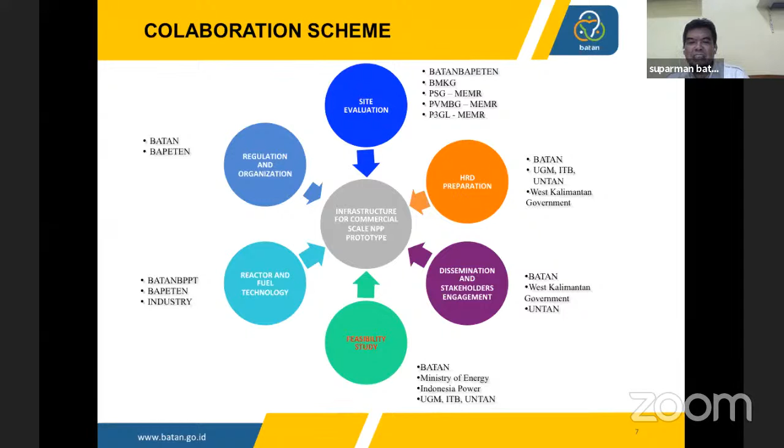And for the feasibility study for non-site, we have cooperation with the Ministry of Energy and also Indonesia Power, one of the companies under PLN interested in these activities. Also some universities are involved, for example Gadjah Mada University from Yogyakarta, Institute of Technology Bandung, and also local universities, Untan, which is Universitas Tanjung Pura, or Tanjung Pura University, in West Kalimantan Barat.

Now the status of national research priority. As we know, from the IAEA we have a guideline on how to perform the nuclear energy program in Indonesia. Based on this infrastructure development, there are 19 infrastructure issues that should be prepared before we implement nuclear energy. We had an Integrated Nuclear Infrastructure Review mission in Indonesia where the IAEA reviewed our readiness of infrastructure.

They found there are still 3 issues not ready yet, namely national position. We know that until now the government has not yet made a decision to go nuclear. Following that, we know there is no NEPIO in Indonesia yet. In the management aspect, there is no operator candidate decided, and then in stakeholder involvement, we need to improve.

So regarding this national issue, the 19 infrastructure issues, we developed the research priority under the IAEA milestone framework, where phase one is pre-project activities. We should conduct a feasibility study or pre-feasibility study, and also a site survey, and these two activities strengthen the national position. We hope that from these activities the government will make a decision. This is milestone 1, and this decision is very important to continue to phase 2, the project activities.

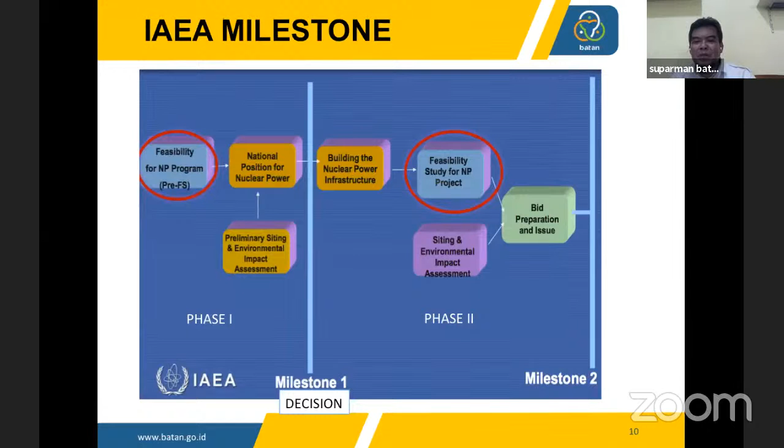As I mentioned before, for this roadmap we are still in phase 1, the pre-project activities. We hope that by 2024 this project will finish, and these pre-project activities will be a consideration for the government to make a decision. We hope the president will make a statement to go nuclear, that there will be a NEPIO, and that nuclear energy will be included in the business plan of the utility company, our RUPTL, the business plan of PLN. After this, we hope the state-owned company, private company, or cooperative will continue to construct a nuclear power plant or SMR in West Kalimantan Barat.

So Batan is only involved in the pre-project activities, because this is a commercial nuclear power plant, and Batan is not allowed to construct a nuclear power plant for commercial purposes. So we only prepare the pre-project study, including site evaluation, as consideration for the government to make a decision.

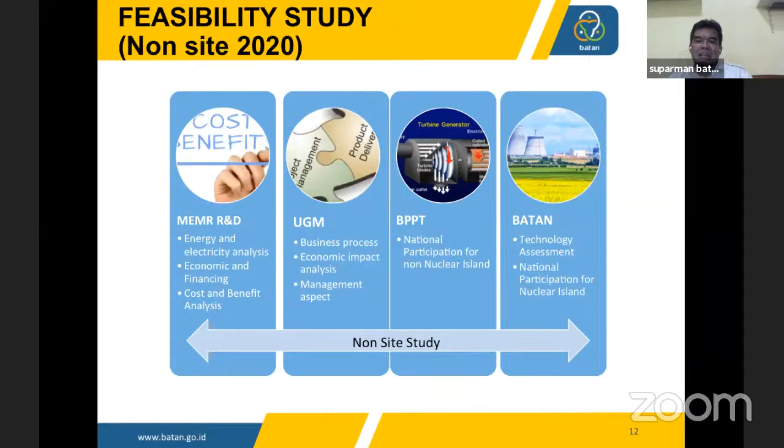These activities were in 2020, and for the site study in 2020, we have done many aspects this year, for example demography, geology, hydrology, meteorology, and so on. We still continue this year because we need time, for example for the geology survey, and we also need money to conduct this aspect.

So why did we select West Kalimantan as candidate site? Because we know that in West Kalimantan there is a lack of electricity, they still import electricity from Sarawak, Malaysia. That's why the government of Kalimantan Barat asked the president to build a nuclear power plant in West Kalimantan to fulfill the demand there.

Another consideration for choosing West Kalimantan Barat is that there is much potential demand from industry. The government of Kalimantan Barat is developing an international port near the candidate site, the Kijing International Port, and the West Kalimantan Barat government wants to build an integrated industrial park near this port along with an aluminium refinery. So the demand is quite big in West Kalimantan Barat to support this industry.

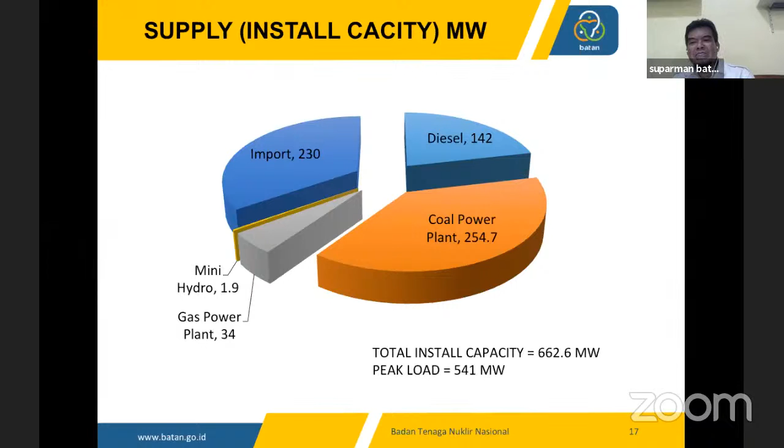Another reason we choose West Kalimantan is that, as I mentioned before, West Kalimantan still imports electricity from Sarawak, Malaysia, around 230 megawatts, almost 50% of the peak load in West Kalimantan. This is concerning because some people in West Kalimantan think that if Sarawak or East Malaysia stops supplying electricity, it would be quite dangerous for the electricity supply in West Kalimantan. That's why many people agree with nuclear power plant development there. Also, diesel generation in West Kalimantan is still high, more than 100 megawatts.

Another thing we know is that the government of Indonesia wants to move the capital city from Jakarta to East Kalimantan, and PLN has a plan to build a transmission line from West Kalimantan to East Kalimantan. So I think if the capital moves to East Kalimantan, there will be much more demand there.

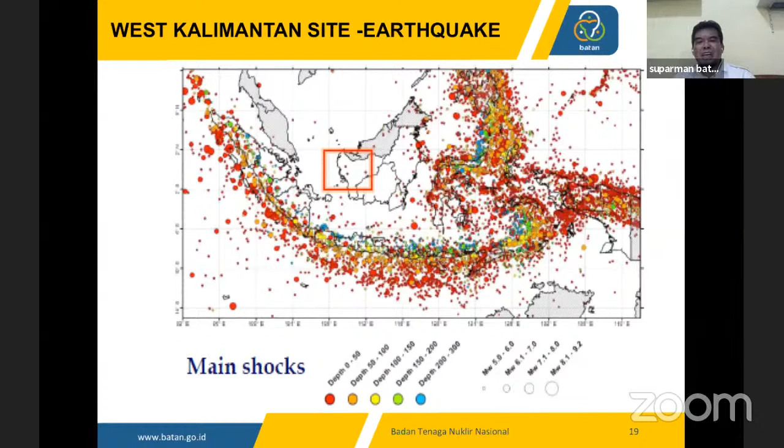In terms of earthquakes, West Kalimantan is very stable because earthquakes rarely happen there, only 4 or 5 times. And there are no active volcanoes in West Kalimantan.

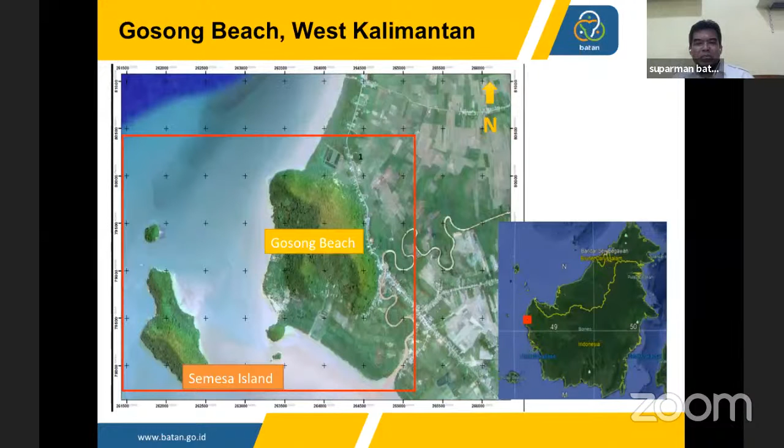Our candidate site is located at Gosong Beach, West Kalimantan, north of Pontianak. Pontianak is the capital of West Kalimantan. In front of Gosong Beach there is Semesa Island, and the distance between the beach and Semesa Island is around 1 kilometer.

For potential sites, besides West Kalimantan, we also have other sites, for example in Muria, Bangka, and also Banten. For large scale NPPs, they can be developed in Sumatra or Java Island because the transmission line and demand are quite big enough for a large scale NPP. But for SMR, small modular reactors, these can be developed in the eastern part of Indonesia, for example in West Kalimantan or East Kalimantan, and also other parts of eastern Indonesia.

I think that's all for my presentation. Thank you very much for your kind attention.

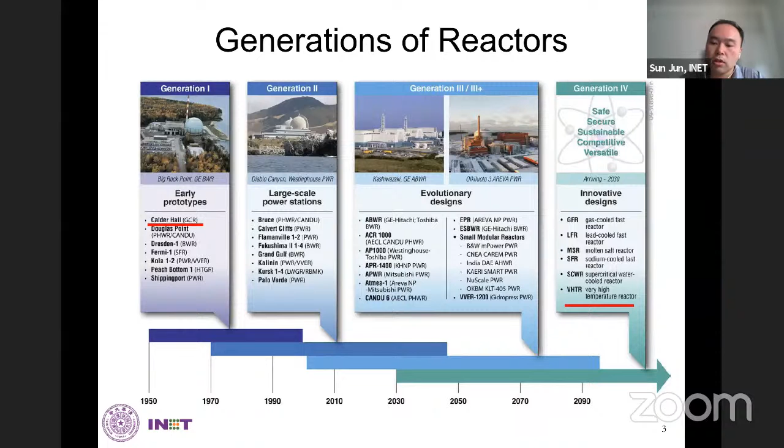So we all know that the gas-cooled reactor has the same history as other kinds of reactors. At the very beginning, we had early types of gas-cooled reactors, but at that time we used carbon dioxide as the coolant, and we have more than 50 units built in Europe, in Great Britain, and other countries. So after that, we realized that we wanted to increase the temperature output of that reactor.

We changed the fuels into ceramic coated fuels. We changed the coolant to helium so that we could increase the output temperature up to 700 degrees C or even higher to 950 degrees C. At that time, we had 3 test reactors built in the world and another 2 prototypes in both Germany and the US. After those experiences with the early HTGR reactors, we found that the safety issue must be emphasized for all this kind of reactor.

Then we had the idea of inherent safety and the concept of modular HTGR. By this kind of concept, we can realize the self-acting decay heat removal of this design, and we have followed this concept to build test reactors and several designs.

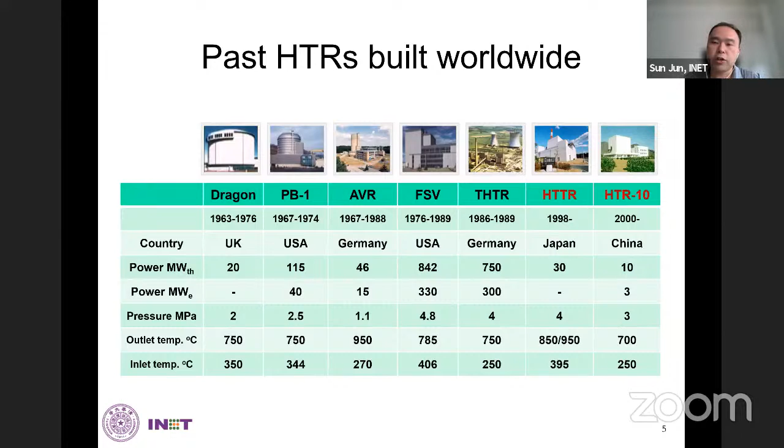So about modular HTGR, what's the technical basis for that? Most importantly, I think there are 3 important points I want to emphasize here. First, we use helium as the coolant because it has very good chemical and neutronic features. Second, we use a lot of graphite as the moderator and the structural material. And also the most important one, we use the unique design of the tri-isotropic (TRISO) particle as the fuel.

By these major features of the modular HTGR, we can realize very high temperature operation, and more than electricity generation, we have more non-electric applications.

Under the framework of the GIF, Generation 4 International Forum, we have built a technology roadmap for this kind of technology. At the very beginning, in the year 2002, we wanted to realize higher temperature output as high as 1000 degrees C, especially for the hydrogen production market.

After 10 years of experience, we found that we still have a larger market for the temperature range between 700 and 950 degrees C. So we divided the technological roadmap into 2 phases. Right now we still have more efforts to realize the temperature around 750 degrees C.

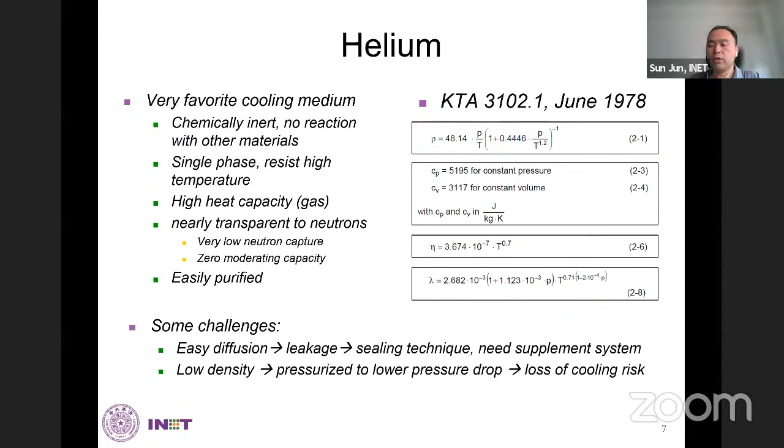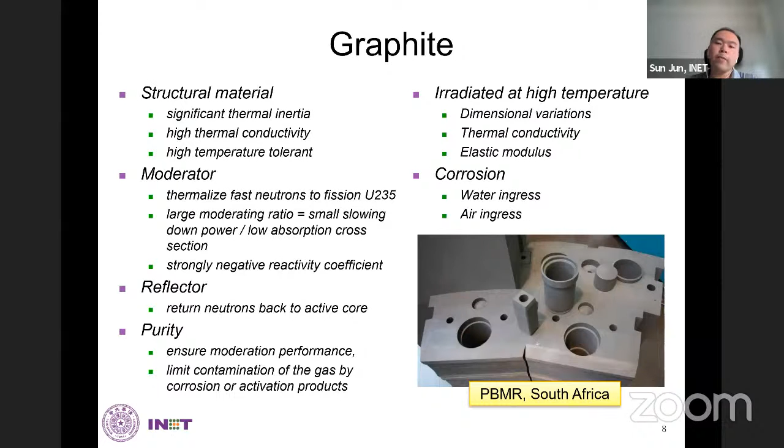And one of the important layers is the silicon carbide that will have the function to retain the fission product inside this TRISO particle during normal operation and even extended scenarios.

So by this very small size of the TRISO particle, we can distribute these particles into graphite, or we can use the spherical element for these particles, or we can put them into compacts. So with the spherical element, we can design the pebble bed type HTGR, or with the compact fuel elements, we can have the shape of a block type element and also the design of prismatic HTGR. So following the modular HTGR designs, we can have prismatic designs or pebble bed modular designs.

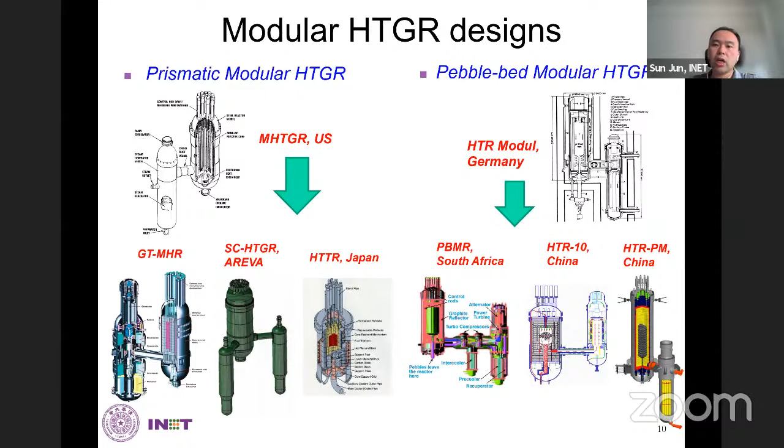And following the design of pebble bed modular HTGR, we have the early one as the HTR Modul from Germany. And also following that, we have PBMR from South Africa, HTR-10 from China, and HTR-PM from China.

So the important point, as I mentioned, is that the modular HTGR follows the idea of inherent safety. Inherent safety also has other names like intrinsic safety, meltdown-free reactor, catastrophe-free, or walkaway safety, etc. So those concepts or names mean that following inherent safety, we can have fundamental measures to ensure safety without any additional systems.

So from three aspects, like control of the power, removal of the decay heat, and also retention of radioactive materials, we can realize the inherent safety design, and we can keep it safe after accidents. So I will introduce them one by one.

The first aspect is reactivity control. We know that this is important for the design of a reactor. For HTGR, we can realize full range negative feedback, and also, most importantly, we have a larger margin for temperature increase during an accident.

If we compare this kind of design a little with PWRs, we can utilize almost a 1000 degree temperature increase during an accident. But for PWRs, maybe we can only use like 20 degrees C. So even if we have the same level of negative temperature feedback, when multiplied by this different temperature range, we can have different reactivity compensation during an accident. So clearly for a modular HTR design, we can have a very large negative reactivity compensation during an accident, to ensure safe shutdown in any conditions.

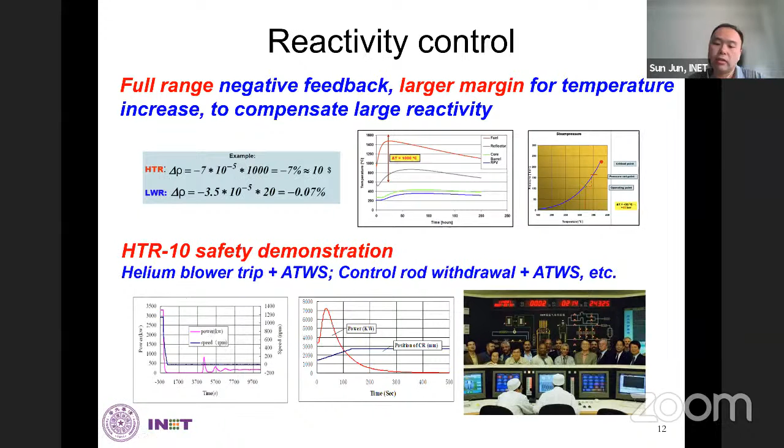The second important aspect is decay heat removal. We all know that after the fission process, we will get decay heat over a very long process. For this, we have to use additional systems, or some design of the system, to remove that heat after shutdown. So historically, we have many ways to achieve that. For example, we can use an active system to do that, or we can apply a passive system to realize decay heat removal. But for modular HTGR, we have a very different idea.

We use the term self-acting removal because, as I mentioned, for this design, we have a lot of material with higher specific heat or higher thermal conductivity.

So during the higher temperature operations, we can use the natural properties of this material to remove the decay heat by heat conduction and heat radiation. So for the design HTGR, we have support from the natural properties of the material, and we can realize self-acting heat removal.

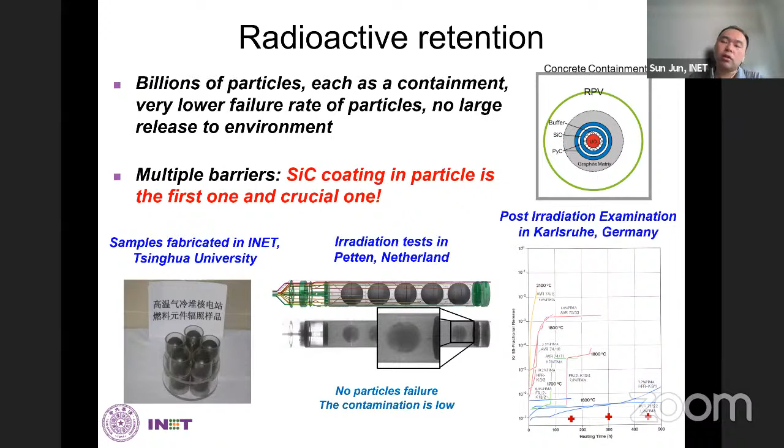You can find more information and knowledge from the recently published book by Professor Kugeler and Professor Zuoyi Zhang. You can find the English version from Springer.

About China, as I mentioned, we chose the pebble bed HTGR, and we still have very clear positions in terms of HTGR technology in China, especially for power generation, cogeneration, and also hydrogen production.

In China, we began our research in the 1970s. It's almost 50 years. After we learned how to design the reactor, we tried to build our own test reactor, HTR10. We are currently undergoing the demonstration plant called HTR-PM, and after that we continue with our commercial plant designs and applications.

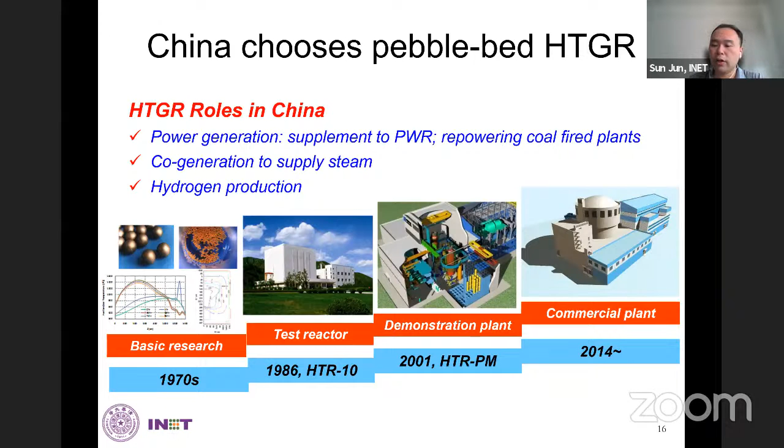For HTR10, it was strongly supported by the central government. We had the National High-Tech Program to support the design and construction. We began construction in 1995. After 5 years, we reached first criticality, and after that we had 3 years of operation at full power.

After that, we demonstrated many kinds of experiments to prove and understand this kind of design. In recent years, we restarted HTR10 and operated it for many purposes. One is to train the operators of HTR-PM. Another purpose is for further experiments, for example to measure the temperature inside the pebble bed core. This year, we still have another program to support very high temperature operation.

You can find some of the major design parameters about HTR10. I think many colleagues have visited our facility in Beijing. For HTR10, we have many operation modes, such as electricity generation, cogeneration, or only heat production. The safety demonstration tests are also famous because they proved the design of the modular HTGR.

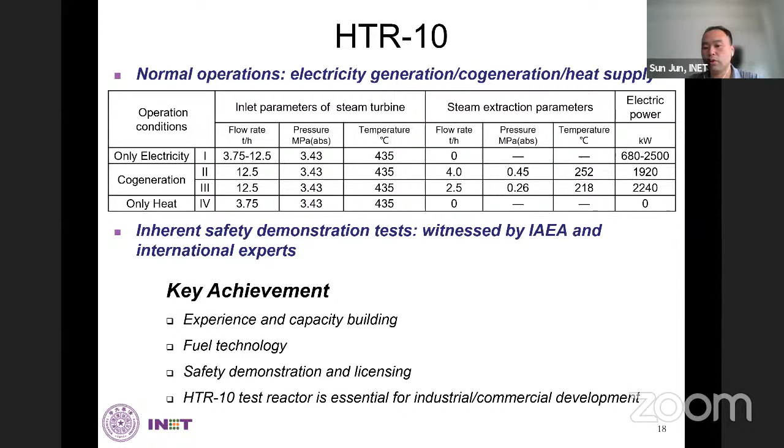After HTR10, we had the idea to build a larger scale HTGR called HTR-PM. The Chinese government continued to support us in R&D, and we have a very good team to deliver this technology for industrial application.

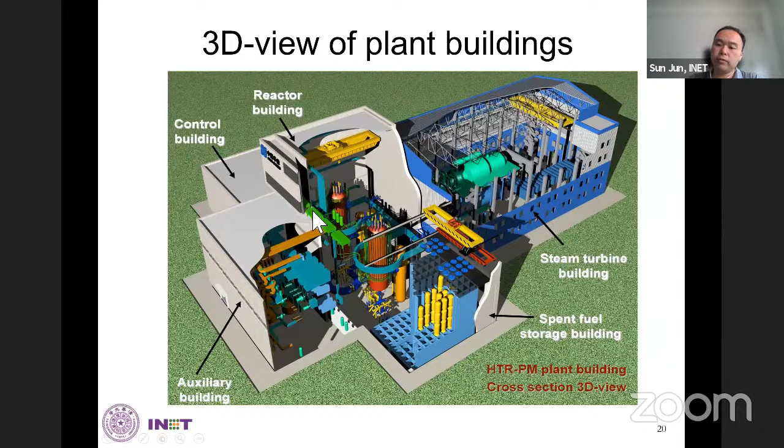For each NSSS modular or reactor modular, we have a design like this: a side-by-side design of the reactor pressure vessel, steam generation vessel, and a hot gas duct vessel to connect these 2. Each reactor can generate about 250 megawatt thermal, and because we have a smaller power density, the core size is large. Inside this reactor, we have around 420,000 fuel pebbles, and by these pebbles it can heat the helium up to 750 degrees C.

About these 2 NSSS, the heat will be transferred from the reactor core to the secondary side of the steam generator. These 2 steam generators will combine the steam into the steam turbine to generate electricity. Also, by several levels of steam extraction, those steams can be used to heat up the feed water and also to increase the energy conversion ratio of this whole plant, which could be around 42%.

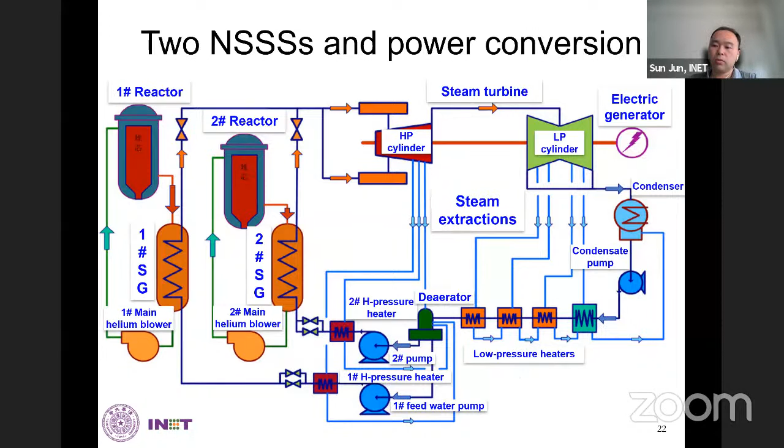So this kind of design is the important basis for modular HTGR if we want to enlarge the power output in the near future. By HTRPM, it followed the design of a modular HTGR, but the implementation of engineering and technology is quite unique in China.

For example, we listed several important items about the innovations and also published that in a recent paper. We use more than 1 reactor modular. We have a design of helical coil tube bundles for the steam generator. We use electromagnetic bearings for the shaft of the helium circulator. We use a different combination of reactivity control system. We improve our fuel handling system designs, and also we use the dry storage system for the spent fuel storage.

Since the scale of these designs are new, we have to verify those designs by the full scale and the full environment under the helium conditions. So we have our own engineering lab for all these tests, and we finished all those tests and proved the design can meet the requirement from the regulatory.

As I mentioned, just when we finished the full power operation of HTR-10, we had the idea to design HTRPM. From 2004, we started the standard design. Then we got support from the government and also the industry partners. Then we continued with our preliminary design, the safety and assessment, and also those verification processes.

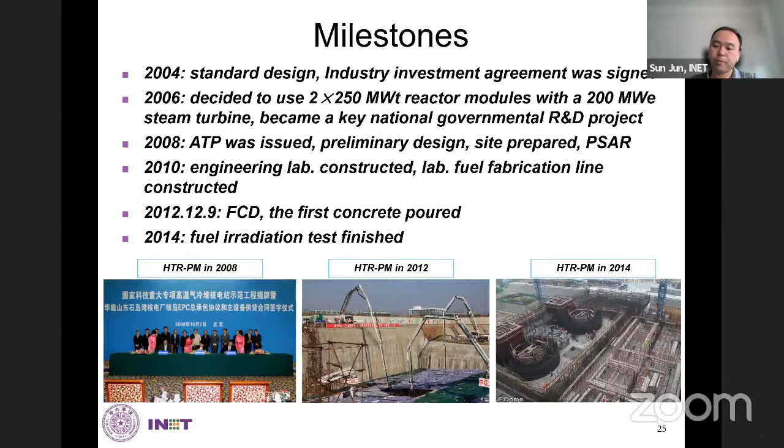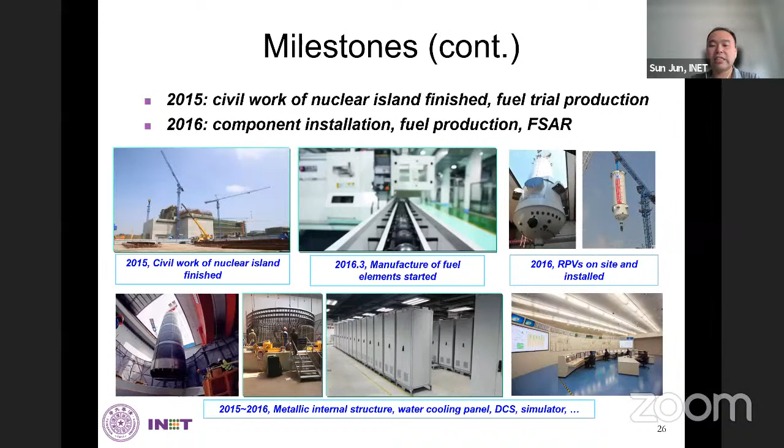After 2015, we almost finished the civil work of the Nuclear Island, and then we started the installation of important components such as the reactor pressure vessel, the metallic internals, the water cooling panels of RCCS, and also other important systems like DCS and the full scope simulators.

Between the years 2017 and 2019, we continued with the installations. The most important and most complicated one is the ceramic internal structures. In this picture, you can see the structural material is thousands of blocks of graphites and carbons. It's important to put every block into position and put the shape together. We also had the installation of a steam generator and a helium circulator during that time.

Then when we came to the year 2020, we started our commissioning. First, we had the cold test, where the pressure boundary reached the design limit. After that, we started the helium circulator to heat it up to 250 degrees C. In March of this year, we finished the hot test of both reactor modulars.

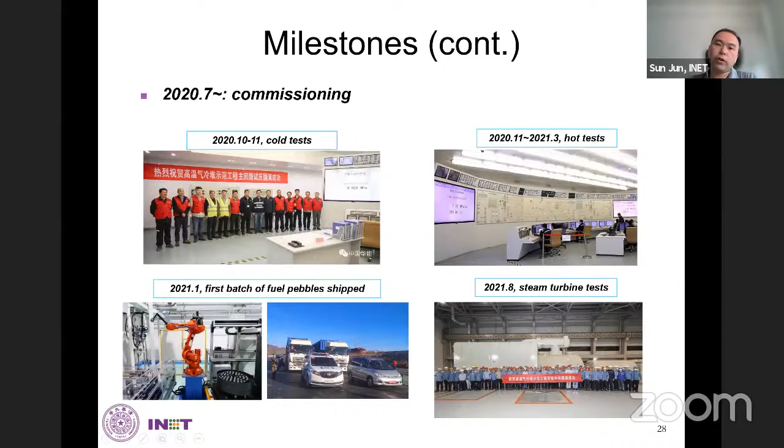At the same time, we have fabricated enough pebbles to prepare for the fuel loading. We delivered the first batch of fuel pebbles to the site at the beginning of this year. Just last week, we almost finished the steam turbine test, but with non-nuclear steam. So everything is ready for the fuel loading. I think we may have exciting news in the coming months.

After HTRPM, we still have plans for a larger size and commercialized HTGR. But based on HTRPM, we have proven technologies to use, such as the design of the NSSS modular. We will use the experience based on those engineering tasks, design, manufacture, construction, commissioning, licensing, and even project management. Those experiences accumulated during the last 10 years will help us shorten the time.

Also, this will decrease the cost of this larger scale HTGR. We have 6 or more NSSS modules planned for the near future designs. Right now we have finished the standard design of HTRPM 600, which includes 6 reactor modules inside the nuclear power plant, and we continue with the feasibility study of some domestic site candidates.

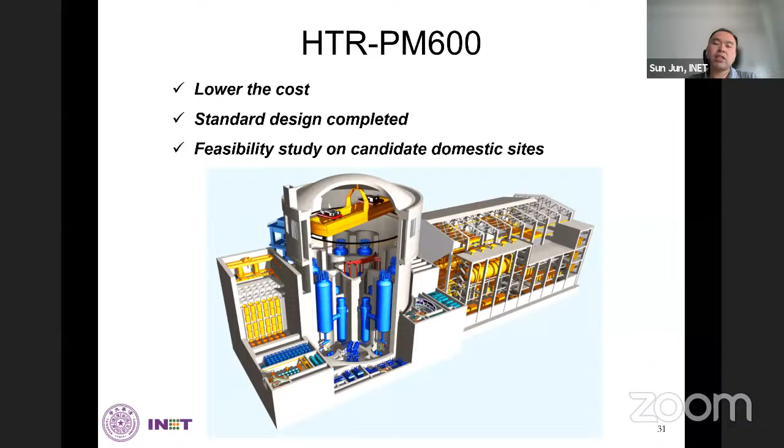The important thing for the design is to further lower the cost and try to have economic competitiveness with other PWR designs. As for the nuclear safety regulatory framework in China, China has developed its new nuclear regulations based on IAEA frameworks, but also combined with national conditions and years of practical experience. We have the same framework as the IAEA, and during licensing processes, the technical goals, safety requirements and standards are consistent with international safety standards.

Also, during the safety review and licensing of HTRPM, it generally follows China's NNSA nuclear safety regulations. For the licensing processes, the NNSA can issue permits or licenses, such as siting, construction permit, operation license, permit of decommissioning, and license for operators. Those are important for the design and operation of these nuclear power plants. So that is almost all the points I wanted to deliver in this presentation.

And this is exactly why we have so many designs of SMR, and so many plans for deployment. But so far, only we are doing it in real—only ACP100 is under construction. There's also a document compiled by IAEA called the Development of SMR All Over the World. It's an annual report, and you can download it directly from the IAEA website. It's quite interesting reference material you can look at after our seminar.

So why is China so interested in small modular reactors? The first thing is that it can do things that larger power reactors like HPR1000 cannot do. SMR is featured by small scale, simpler design, and lower cost, so it's economically feasible. It also has higher safety, and the technical feasibility to be built even among denser populations.

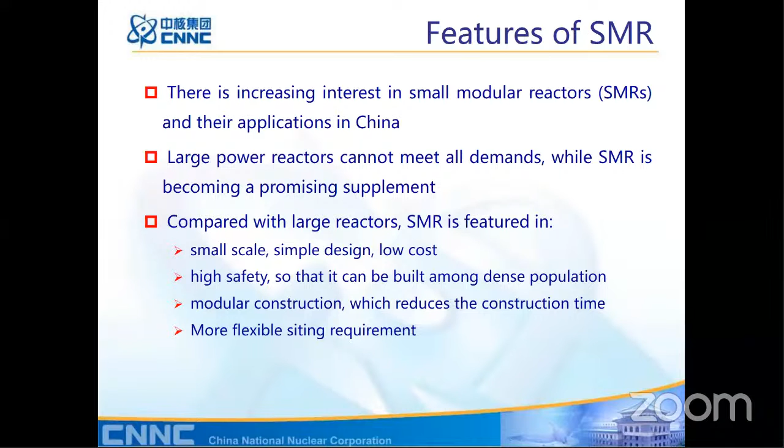It can be modular constructed. Some can even be constructed in plant and transported to the site. Construction period could be dramatically shortened, which is another good thing for its economy. Also, it could have much more flexible siting requirements, so you don't need to find a large rock—it can just be implemented. One application is to replace fossil plants, as flexible as that.

Then come to the applications—because of these features, the small modular reactor's applications are vast. One is to replace coal power plants, especially in the northern part of China, where there are a lot of smaller coal fossil plants generating less than 200 megawatts of electric power. Phasing out these plants is a national strategy to reach peak carbonization by 2030, as well as carbon neutrality by 2060.

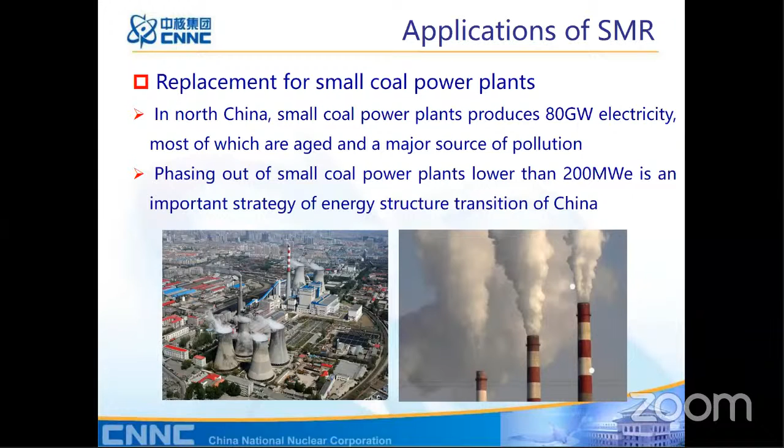So it's quite fitting for small and medium electricity grids—for isolated grids, like islands, as well as small cities. As for Indonesia, called the nation of thousands of islands, I believe small modular reactors are quite fitting for these situations.

Also, it can provide for special requirements like mining in remote areas, for high energy consumption plants, and things like that.

The other application is for regional heat supply. This is also a large part of reducing carbon dioxide emissions. The industrial heat demand in China is now around 1 billion tons of steam, and this occupies 10% of the total carbon emissions.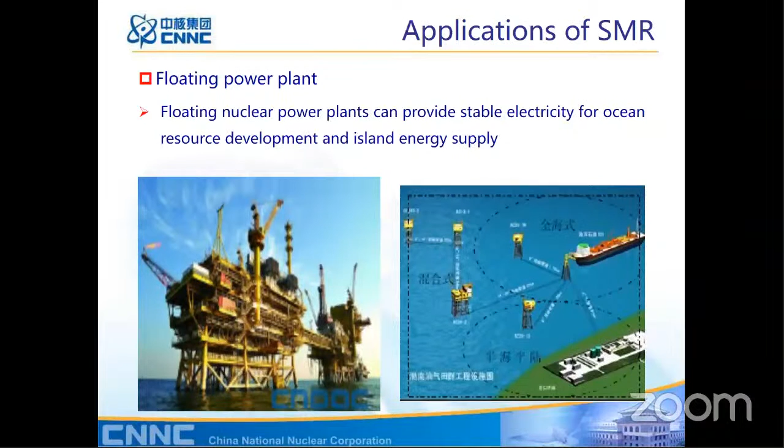The other application is seawater desalination. Coastal cities around our coastline, especially major cities in China, actually lack fresh water. Some participants today might have heard of the significant engineering project transferring water resources from the south part of China to the north part of China—it takes nearly 20 years, and now it's under operation. But SMR is an alternative way to also tackle this problem.

So with the wonderful features of SMR and all these practical applications, it just started very beginning 30 years ago. Now we have developed, especially CNNC has developed our series, which includes not only ACP100, but also what we call DHR for heat supply, as well as the high temperature reactor, as Dr. Sun has just presented. So all of these small modular reactors in China are mostly pressurized water reactors.

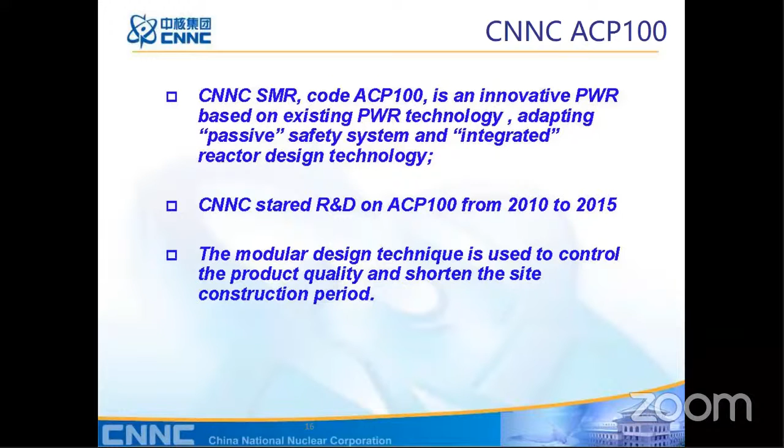We are adopting what we call the passive safety system with the integrated reactor design technology. The design phase ran from 2010 to 2015, for 5 years. It uses the concept of modular design for quality control, as well as to shorten the construction period.

So at the very beginning, we have certain special demonstrations for technologies. This is the start line.

And then we finalize the general design, or what we call the top design. We updated our design after the Fukushima accident. We finalized our preliminary safety assessment report, which is a sign of the accomplishment of the standard design.

Of safety review by an independent third party, the IAEA. This is how we started the design and helped finalize it, with the promising certification, or the independent third-party review. So this is not us saying we have a good design, but other experts saying your design is feasible, is engineering proven.

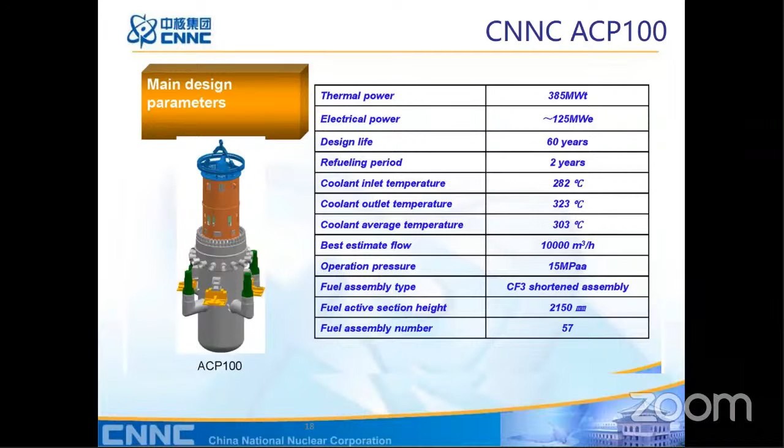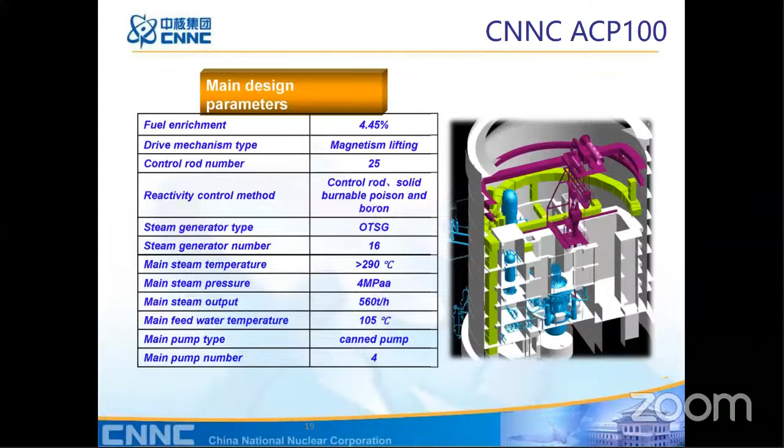And we have our own fuel supply, what we call CF3, so there's no worry about shortage of that. We are really good at making things. And also we have our unique technology, what we call the once-through steam generator, which promises high efficiency, as well as one really important feature, this integral design, as well as the canned pump.

Another thing is that we have less than 1×10⁻⁷ predicted core damage frequency, as well as one magnitude lower, that is 1×10⁻⁸ per reactor year of predicted large release frequency. This frequency is similar to a star hitting the Earth with dramatic disaster. So it's really acceptable.

Because of all the engineering optimization and design changes from the experience of the Fukushima accident, the safety is guaranteed.

And here is what we call the integral design. The conventional, very first generation of PWR started from this, what we called the loop type. And then we moved further into the compact design. But we do believe the most feasible and most advanced is the integral design.

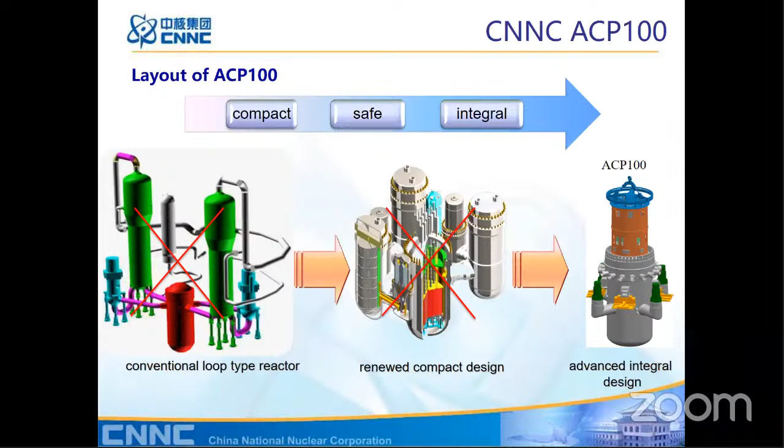We eliminate the LOCA, the loss of coolant accident, the most serious accident for PWR. We practically eliminated it by this integral design for large LOCA. And this is why its safety is guaranteed, based on innovative technology of the once-through steam generator, as well as canned primary pumps.

What you can see is the integration by the steam generator as well as the pump. The key technology for safety, for better operation.

Another one is that the most important thing of a reactor is its reactor core. And these are all our own patented technology: the most advanced CF3 fuel, as well as the core monitoring and detection system.

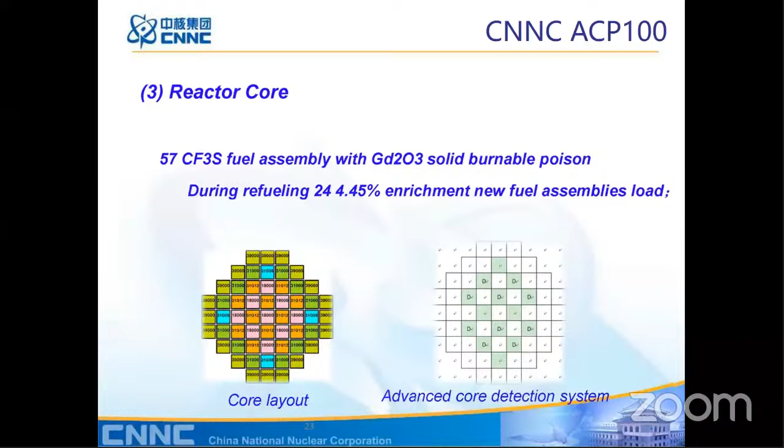And as well as safety, we have here the integral and passive safety. I'll come further with that. So there's no active emergency cooling system, there's no active containment spray and recirculation system. There's no need for operator intervention for at least 72 hours, that is 3 days, enough for all kinds of recovery that you can have. And there's no safety-related emergency AC power, so we just need some batteries.

And the integral design minimizes both the probability and impact of design basis accidents, as well as we have a much smaller emergency planning zone. And this is the technical feasibility for putting a reactor near the center of a population zone.

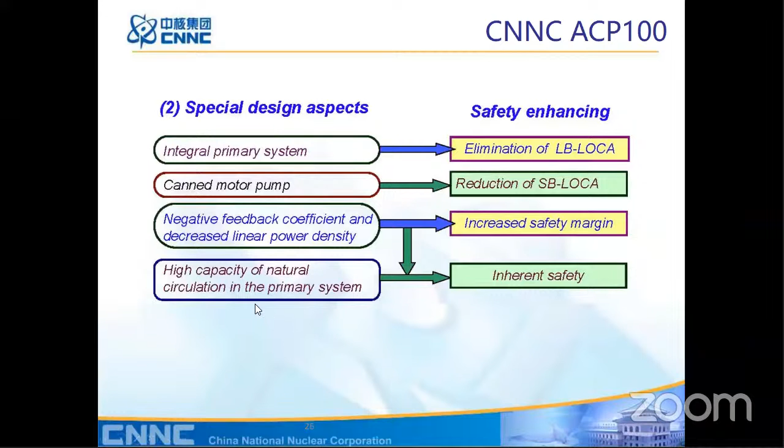What we have, some of which I have already mentioned: the elimination of large breaks, reduction of small breaks, increased safety margin, as well as inherent safety by natural circulation of the primary system. Also, core coverage is guaranteed by the core makeup tank as well as the accumulator.

This is the same for all passive safety designs. But here we have natural circulation between the core and the cavity, as well as heat conduction to the large pool outside of the containment. That is the guarantee, that is the most promising ultimate heat sink.

And this is exactly why we can have one magnitude lower for the core damage frequency, as well as the large early release frequency.

Because of the sound safety of ACP100, we now have a smaller non-residential area as well as planned restricted zone. And we have guidance from the safety authority, the NNSA, the National Nuclear Safety Administration of China, that under strict circumstances, if your technology is advanced enough, the restricted area could be less than 100 meters.

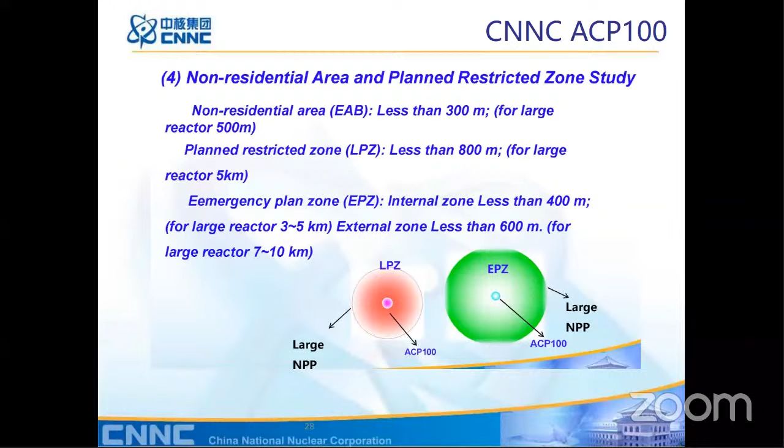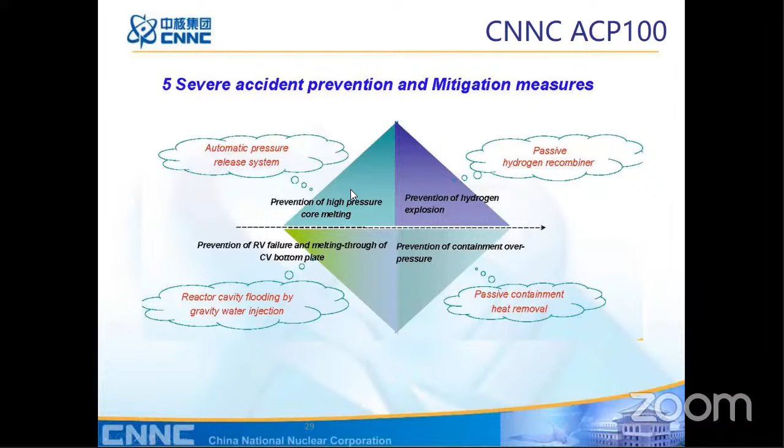Also another part, especially after the Fukushima accident we talked a lot about, is the severe accident. We have all dedicated systems, countermeasures to cope with all expected phenomena like core melting, high pressure core melting, hydrogen explosion, as well as the melted core within the reactor vessel. All this design is reviewed by us as the generic reactor safety review, organized by the experts from IAEA.

And why could we pass this third-party independent review? Because we have done experiments. We have demonstrated feasibility, demonstrated this technology by experiment, not just by design. We have shown them these are consistent with our design. And these are the most important ones, like the control rod, the fuel assembly, the activation of the passive heat removal system, as well as the passive containment heat removal. And all of these take really long time.

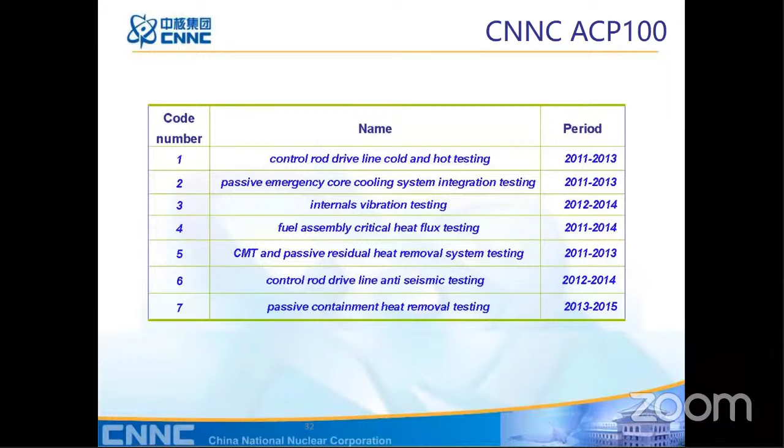Some of them 2 years, and some of them even longer, years. What you have seen here, these are all the experimental facilities, but just some of them. What we call accumulation of experiments, know-how of your design. Why we are so confident of our design, why we are so confident that they are good.

And of course, another part is for the equipment. Not only to prove that our design is feasible, but also we have to prove the design of the equipment, the manufacturing of the equipment is not only reliable, but also economically feasible. And we have done that now.

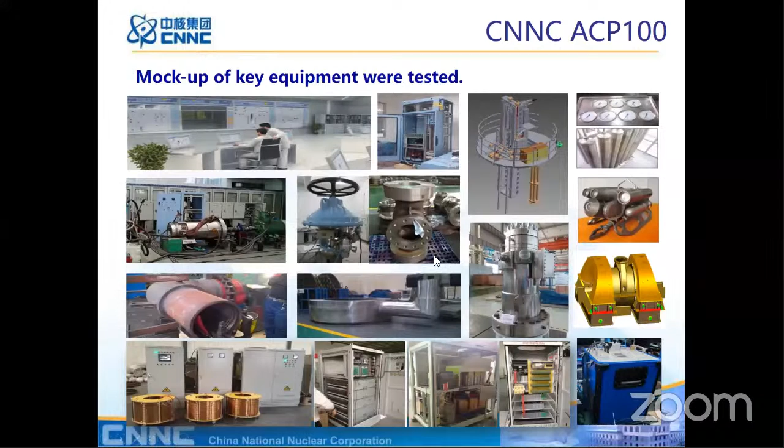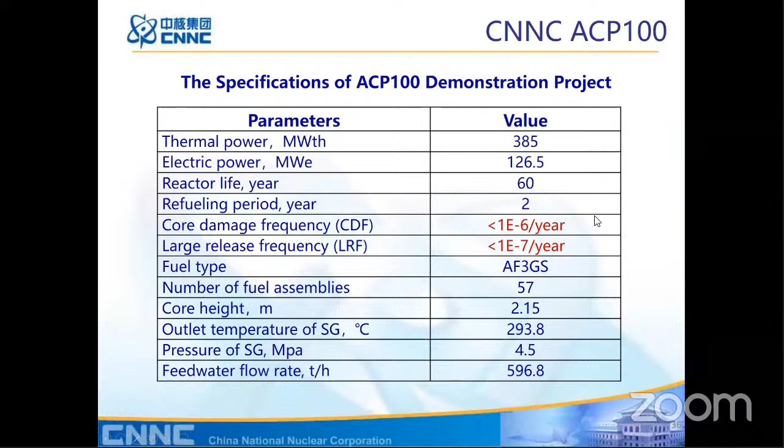And this is the final design, what we call one reactor, one turbine design. And this is the final specification for the demonstration project. And this is where it's located, also on the island, the Hainan province. And here is the site.

And actually, this is a nuclear power base consisted of ACP100, our demonstration project. Also a larger one, 2 of Hualong One, and also 2 of 600 megawatts, roughly, already in operation.

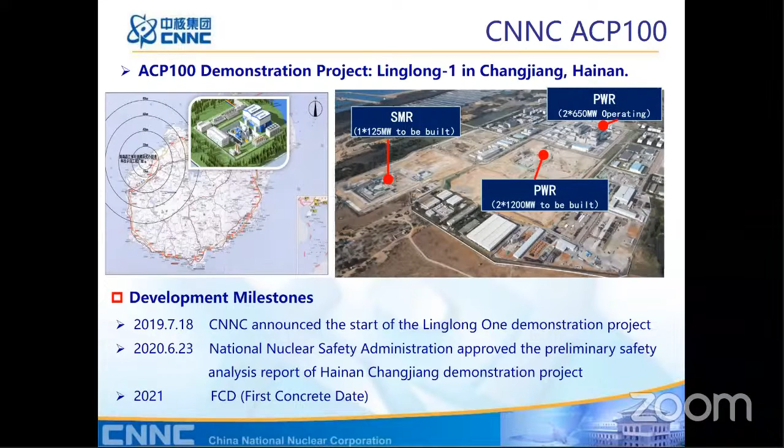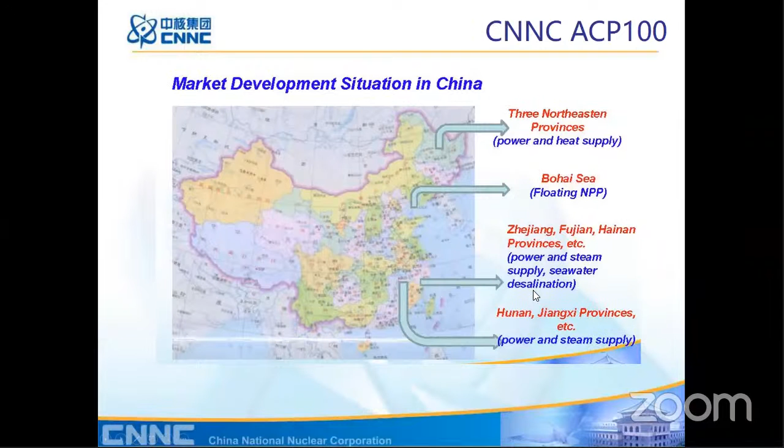And after this demonstration project, as I've shown you the multiple applications, we are still looking for more projects in China for power and heat supply, for floating nuclear power projects, for seawater desalination, all of these are in progress. And we also have international potential customers interested in this technology. All this communication is organized by CDEC, and thanks to Mr. Huang and his team, they have devoted a lot.

So as the last but not least part of the presentation today, I would like to share with you one story, my personal story. When I was very young, like 5 or 6 years old, we had these comic books, and one of them was about nuclear power - yes, about fusion technology. With this power, we can have resources cheaply enough for the whole world, as the most bright future.

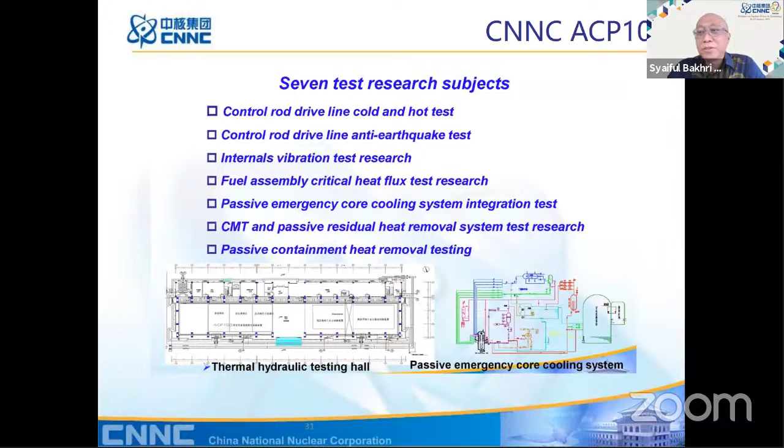We have 7 questions for you in the chat box. I'll read them one by one. The first is from Professor Djarot Sulistio Wisnubroto: Small modular reactors, or SMRs, hold a lot of promise for the future, including the ACP100, but they face important hurdles. Securing financing for SMR is one such challenge. How does CNNC find a solution to make SMR, especially the ACP100, more attractive from an economic point of view?

Perfect. Yes, that is a really interesting question, and it's been discussed a lot through recent years. My personal perspective is that there are three things we need to further develop, specifically for SMR. The first thing is the application, it's to choose your market.

So normally, if we would like to deploy this small modular reactor in China, for example in the northern part, our marketing strategy is to take heating first, ahead of power generation. That's the first thing: choose your application according to the expectation of its economic outcome, because heat is much more expensive in the northern part of China compared to power generation. It's more economically feasible for the deployment of SMR.

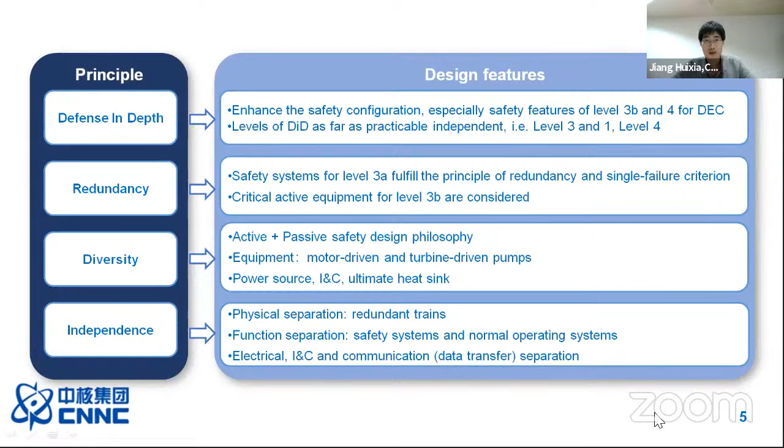The second part is the technical features of HPR1000.

First, let's take an overview of the HPR1000 design characteristics. It satisfies the latest nuclear safety codes and standard requirements, both from China, IAEA, or other international organizations. It also fulfills utility requirements for advanced light water reactors, like EUR or URD from Europe and the USA. It also integrates feedback from the Fukushima accident; we set interfaces for several kinds of mobile equipment for extremely severe conditions. Our HPR1000 is an evolutionary design based on proven technology. All this makes it a safe, reliable technology with economic competitiveness compared with other Generation 3 PWR NPPs.

Now the general parameters of HPR1000. First, the reactor core thermal power is 3,180 megawatts, and the nominal electrical power output is about 1,200 megawatts, maybe a little different according to different site conditions. The design plant life is prolonged to 60 years, compared to Generation 2 commercial PWR NPPs, with a refueling cycle of 18 months, and plant availability more than 90%. These make HPR1000 more economical.

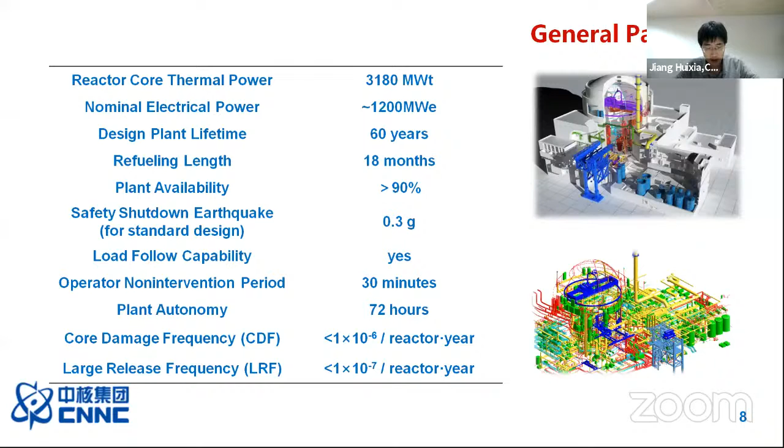Now let's see some detailed design information. For the detailed design, first the reactor and primary system: the reactor core consists of 177 fuel assemblies with lower linear power density, to ensure sufficient core thermal hydraulic margin.

We have two reactivity control systems: one is control rod and the other is boron. They both ensure reactivity control functional capability and reliability, along with the refueling cycle of 18 months and load-follow capability, as mentioned in the last slide.

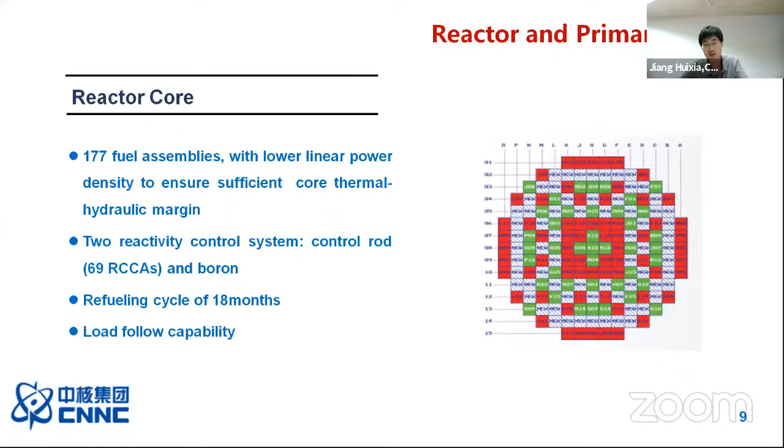Then the fuel assembly: we use the independent CF3 assembly with an innovative advanced cladding material, N36, and designs of the grid nozzle and guide tube. It's composed of 264 fuel rods arranged within a 17x17 supporting structure, and the performance and burnup satisfy the refueling cycle of 18 months.

The primary system of the reactor coolant system consists of a reactor pressure vessel containing the reactor core and core internals, based on a mature 3-loop design. Each loop contains one reactor coolant pump, one steam generator, and main pipes between them. At last, one pressurizer and the surge line are connected to the main pipes to control the pressure and temperature of the system.

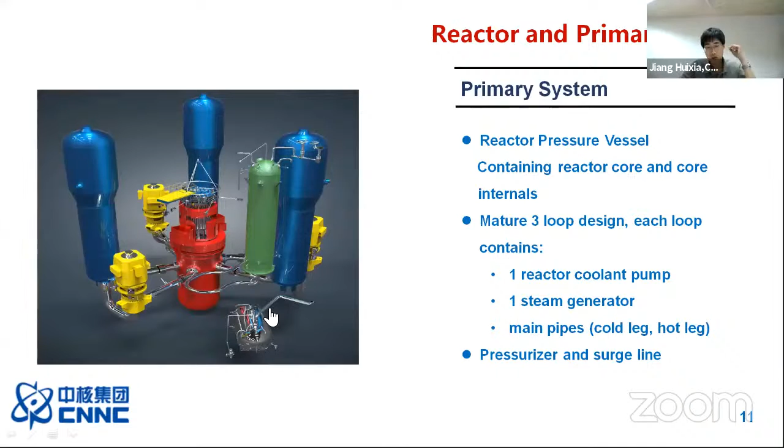Then the design of buildings and structures. The nuclear island building is a single unit layout. The benefits of this layout provide physical separation, reducing interactions between different units compared to traditional PWR NPPs. It's also very convenient for plant construction, operation and maintenance, and more flexible for plant siting.

For the reactor building, the design of the containment is a double shell containment. The inner shell is built by pre-stressed reinforced concrete with a leak-tight steel liner inside, and the outer shell is a reinforced concrete structure to protect the inner shell from outside hazards.

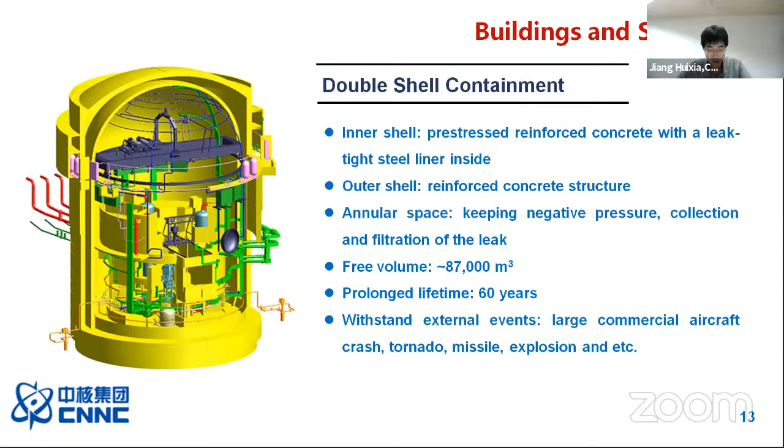The containment has a larger free volume of about 87,000 cubic meters, so it reduces the pressure during accident conditions. Its lifetime is prolonged to 60 years, consistent with the plant lifetime. This design of the containment can withstand external events, including large commercial aircraft crash, tornado, missile explosion, and so on - an enhanced capability of protection against external events, especially earthquake and aircraft crash.

As mentioned before, the seismic input with peak ground acceleration is 0.3G to have better site adaptability. For aircraft crash protection against large commercial aircraft crash, we have APC shell, anti-plane-crash shell protection for the reactor building, fuel building, and the electric building containing the main control room. But the safeguard building containing redundant systems is not protected, because they are put on the opposite side of the reactor building, so they will not be damaged at the same time.

Then the safety design philosophy of the safety systems: both in DBCs and DECs, we use active plus passive safety design of these safety systems. The active measures are proven and verified based on mature design of traditional PWR NPPs, and the passive ways need no AC power, so they provide reliable and powerful additions to the active safety features.

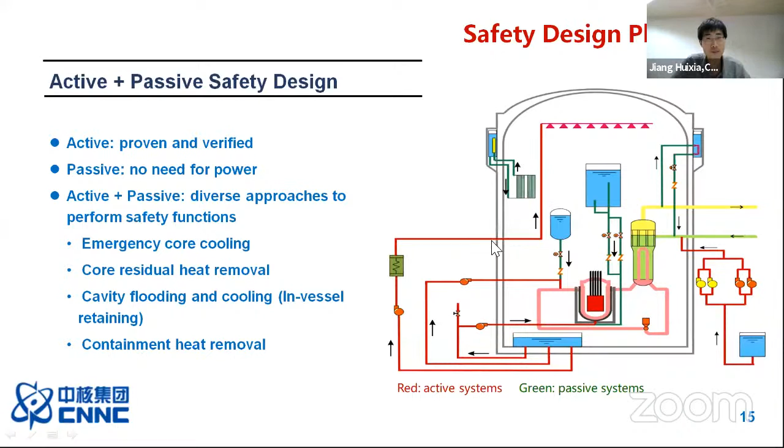First, the engineered safety features for DBA in defense in-depth level 3A. We have three main engineered safety systems: first, the safety injection system for emergency core cooling; the containment spray system for containment heat removal; and the auxiliary feed water system for core residual heat removal from the secondary side.

Then the safety features for multiple failure in defense in-depth level 3B, also called DEC-A, meaning design extension conditions without core melt. We set several kinds of safety measures to cope with different typical multiple failure modes.

For example, we use an emergency boron injection system for ATWS, SBO diesel generators for station blackout, and diverse cooling chains - both active and passive - to cope with loss of ultimate heat sink. We also have a diverse actuation system, called DAS, to cope with common mode failure of the protection system, and a passive containment heat removal system for loss of the containment spray system.

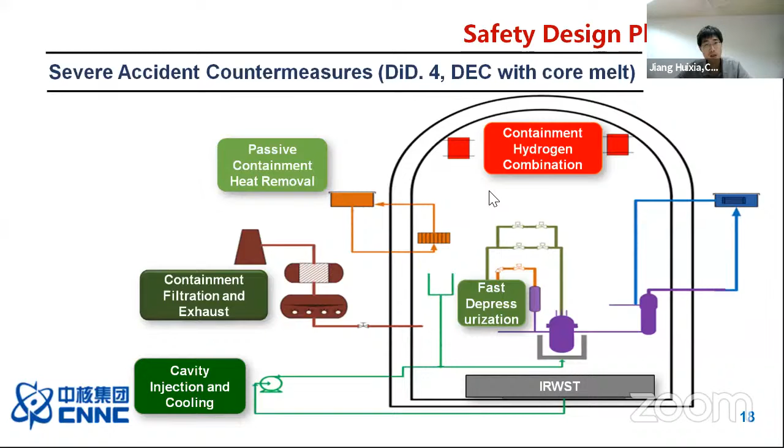We also learned many experiences, so we take these Fukushima feedbacks as additional emergency measures for extremely conditions beyond our design envelope.

For example, we set additional emergency water makeup and associated interfaces, and improved temporary power supply with SBO generators and mobile generators in extremely severe conditions. We enhance the radiation and hydrogen concentration monitoring under severe accident conditions, enhance the spent fuel pool monitoring and cooling capability, and the seismic and flooding design has more conservative margin. We also enhance the habitability and availability of the emergency facilities.

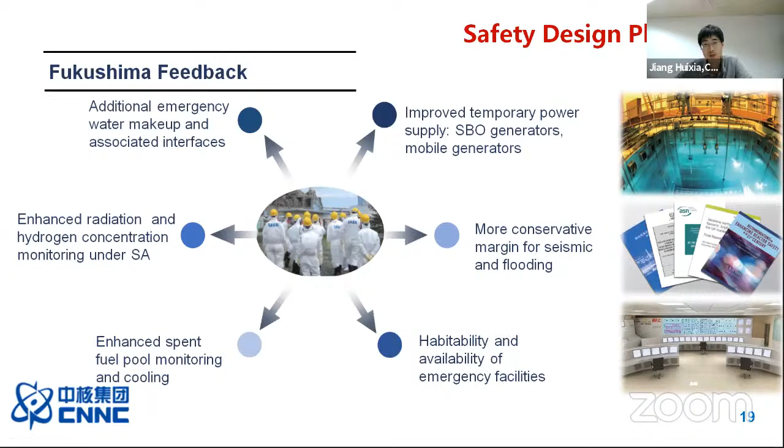The design of HPR 1000 is based on proven technology. The NSSS, the nuclear steam supply system, is based on mature design, with very similar configuration with operational experience of more than 1,000 reactor years. Most advanced features are based on experience of previous NPPs, and new features verified with experiment. Main equipment is compatible with mature manufacturing capability with proven quality, reliability, and maintainability. The design solidified for the demonstration project, and we passed the independent safety reviews of different organizations.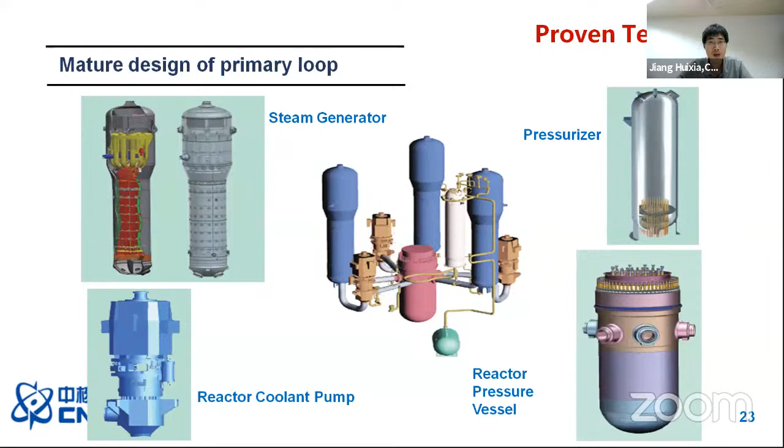And the verification tests and experiments for newly applied technologies, especially for the three main passive safety systems for the design extension conditions. For example, the test for the passive residual heat removal system for the secondary side, the PRS system; the test for the passive containment heat removal system, the PCS system; and test of the cavity injection and cooling system, the CIS system.

And the proven equipment - all the key equipment is based on mature technology, and the equipment is compatible with existing manufacturing capabilities.

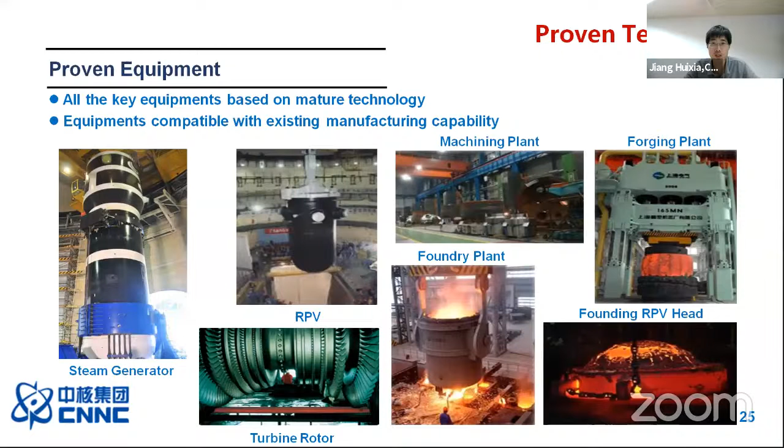During the design of HPR 1000, we passed several independent reviews. For example, the independent review by NASA from Argentina, and the general design was approved by NEA and NNSA of China government, and the basic design was reviewed by the CNEA, the China Nuclear Energy Association.

And the safety review for the demonstration project, the Fuqing Unit 5 and 6, and the Pakistan Karachi Unit K2 and K3. The PSAR for Fuqing Unit was reviewed by NNSA, and the PSAR for Karachi K2 and K3 project was reviewed by the PNRA of Pakistan.

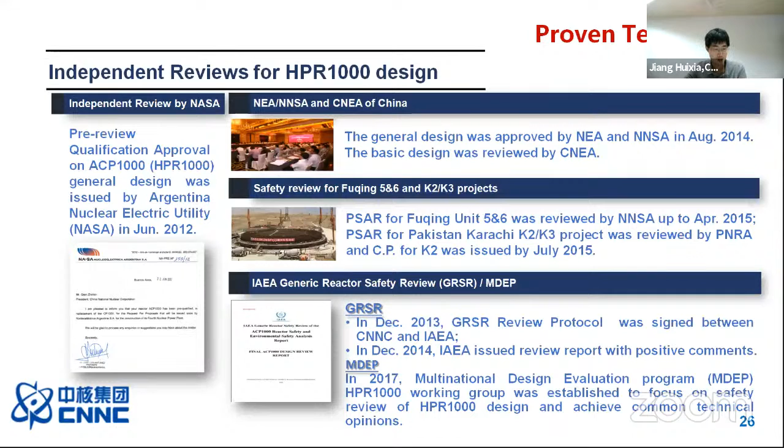We also submitted the generic reactor safety review report to IAEA in December 2013, and one year later the IAEA issued the review report with a positive comment. We also joined the MDEP program - the HPR 1000 work group was established to focus on the safety review of HPR 1000 design and achieve common technical opinions.

Then the third part, the information of the demonstration project - first in China, the Fuqing Nuclear Power Plant Unit 5 and 6. This is the bird's-eye view drawing of the Fuqing NPP. The first 4 units are of reactor type CNP 1000 Generation 2+ reactors, and Unit 5 and 6 are HPR 1000. The FCD date was on May 7th, 2015.

Here are some photos of important milestones of Unit 5 of Fuqing NPP, the FCD and the containment dome installation.

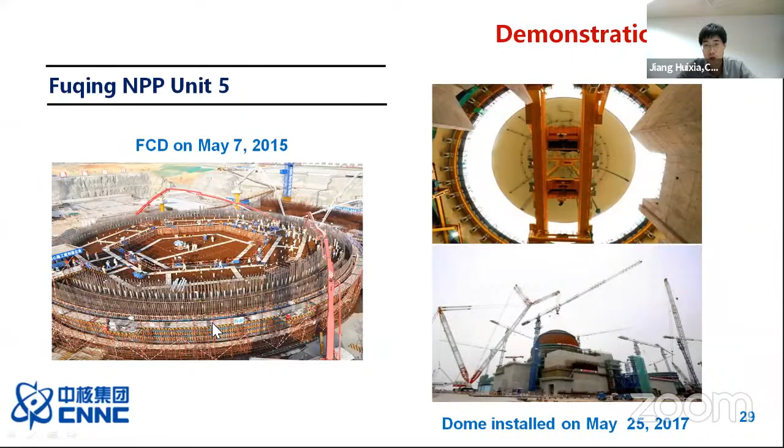And the latest progress of Fuqing Unit 5 - the first grid connection was in November last year, and the demonstration run lasting 168 hours was completed this year in January, and it began commercial operation 1 day after that.

Now the Fuqing Unit 5 has been running safely and steadily at full power since it entered commercial operation, with the exception of the Spring Festival peak regulation shutdown during February. Until now, there have been no unplanned outages and no unplanned forced power reductions - that's a very outstanding performance compared to other Generation 3 PWR NPPs.

And here are the progress of the second unit, Unit 6 in Fuqing NPP. FCD was also in 2015, about half a year later than Unit 5. This year in January, the cold functional test was completed, and in July, the inner containment integrity test was also completed. The project safety and quality is well under control, and the unit is scheduled to begin operation by the end of this year.

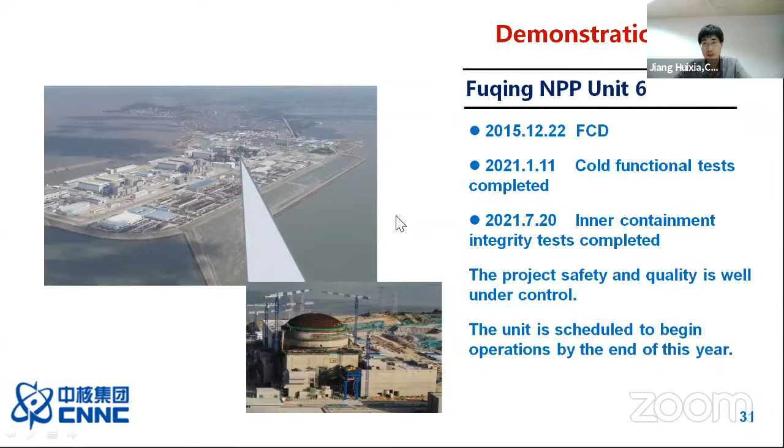Now, the first two HPR1000 units exported out of China are in Pakistan, Karachi, K2 and K3 units, just behind Fuqing Unit 5 and 6. K2's FCD was also in 2015 in August, and initial fuel load last year in December. This year in March, the first grid connection, and the formal inauguration ceremony was held by the Pakistan Prime Minister Imran Khan in May. The second unit, K3's FCD, was one year after that of K2.

This year in April, the cold functional test was completed, and the overall progress difference between K2 and K3 is about 12 months. Until now, the construction progress is well under control through effective project management as well as effective local participation.

Then the last part, the latest progress of the subsequent units of HPR1000. These pictures show the NPPs in China now. The HPR1000 is in three sites: the demonstration project, Fuqing NPP, and the first two subsequent projects, the Zhangzhou NPP and the Changjiang NPP in Hainan province.

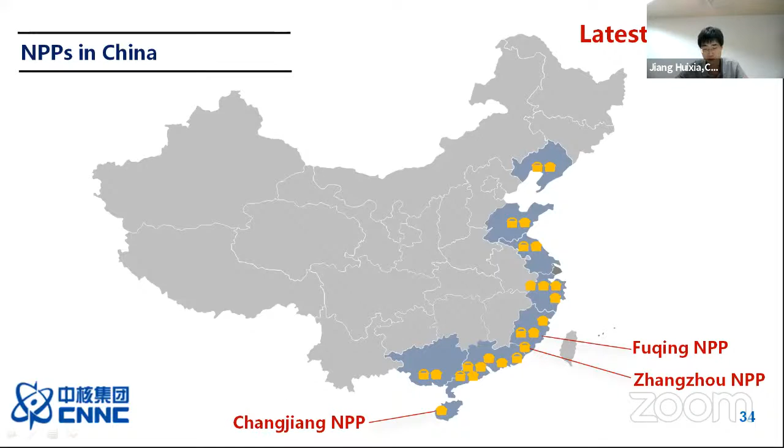Until now, the successive optimization is still going on for the design and research of HPR1000, mainly from four aspects: the latest safety requirements of the codes and standards, for example the latest version of nuclear safety codes and guidance of China, and also the feedbacks from the demonstration projects, both from Fuqing and Pakistan. The design optimization is based on feedbacks from the utilities, and also optimization to reduce the cost and shorten the construction period so as to improve the economy. All this optimization is for the future HPR1000 projects for batch construction.

For the first subsequent project, Zhangzhou NPP Unit 1 and Unit 2, the first following project for the HPR1000 batch construction, about 50 design improvements will be implemented, with nearly 100 other design optimizations based on the utilities' feedbacks. For example, the main improvements adopted by Zhangzhou NPP Unit 1 and Unit 2 project.

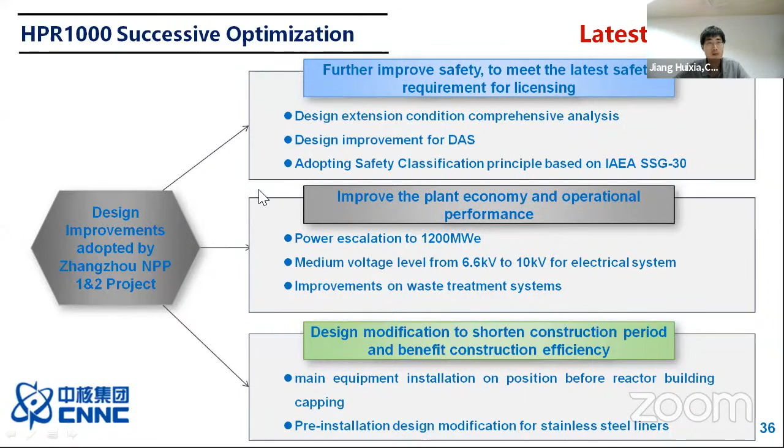Especially for Zhangzhou NPP Unit 1 and Unit 2, the general progress for Zhangzhou NPP: first, the project approval and licensing. The project approval was obtained April 8th 2019, and the construction permit was issued by NNSA in the same year. As for the engineering and on-site progress now, the preliminary design has been solidified, and detailed design is proceeding. Construction drawing documents satisfy the on-site progress now.

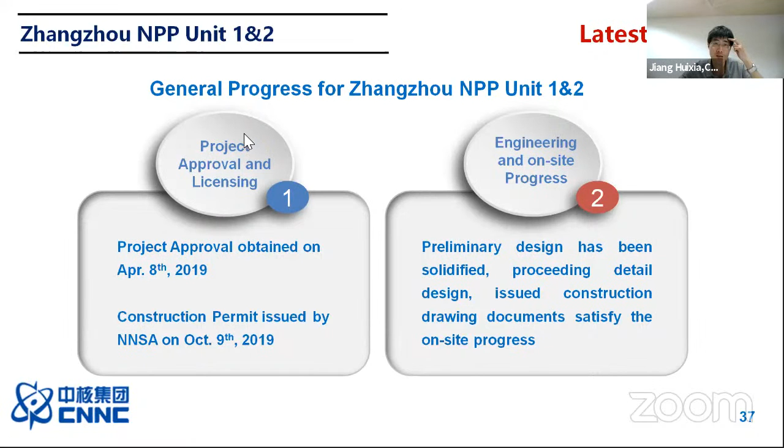Here are the latest progress for Zhangzhou NPP, and some photos from the site. FCD for Unit 1 and Unit 2 were in 2019 and 2020. Now the whole site is under civil construction stage, and the design, procurement, and construction progress is well under control according to the schedule.

And also some other projects after Zhangzhou. First is the Changjiang project in Hainan Province, Unit 3 and Unit 4, the same site as the ACP100 SMR. The project approval was obtained in September last year 2020, and this year in March, the Unit 3 FCD occurred. Now it is also under civil construction stage. There are two photos of the Changjiang NPP site.

And also some other subsequent projects are underway now. For example, the Pakistan Chashma Unit 5 general contract has been signed, and the preliminary design and the PSAR were initiated. Zhangzhou NPP Unit 3 and Unit 4 are in the pre-site preparation phase now.

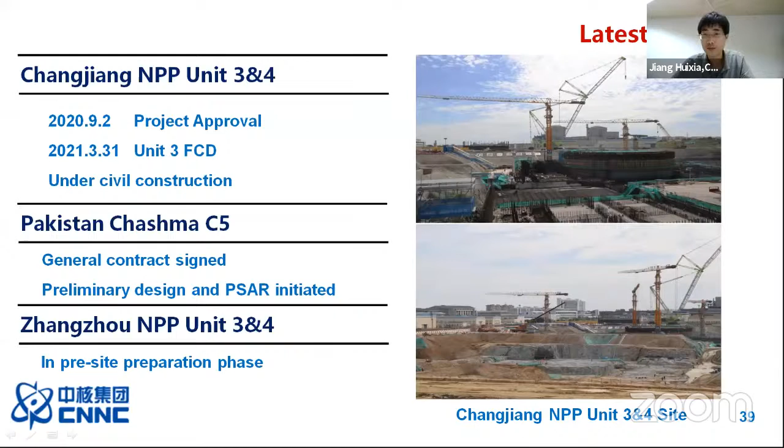Okay, we had four questions for you. The first one from Mr. Deputy, Mr. Suryantoro, is pretty straightforward: how about the cost of first of a kind, the cost of nth of a kind, and the time for construction, please?

Excuse me, I'm not very familiar with economy affairs. What do you mean by first or nth cost? The first of a kind cost, the first construction perhaps at that time. And now I believe you've constructed the ACP 1000 or HPR 1000 for a number of plants, haven't you? Yeah, I will check that number of plants.

In my impression, the cost of the demonstration project of HPR 1000 is about, I think, $2,000 US per kilowatt.

And the time for construction, as in the presentation, the Fuqing nuclear power plant Unit 5 had already entered commercial operation. Its construction time from FCD to commercial operation is about 68 months, from May 2015 to January this year.

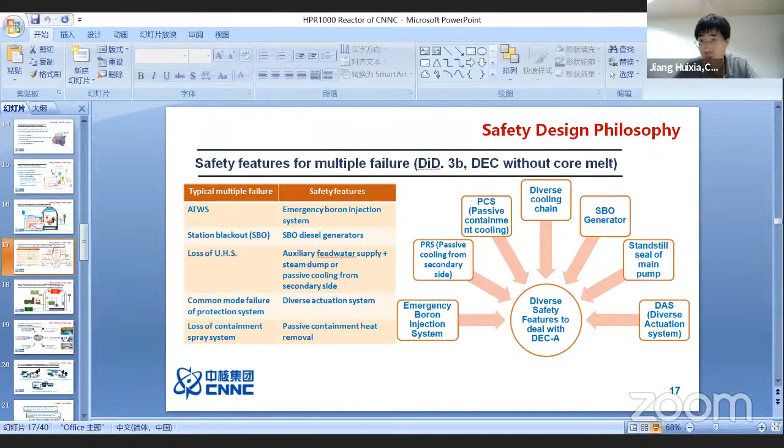Okay, yeah, that's clear.

For the station blackout system, we use SBO diesel generators. This is mainly because its capacity is not as large as the EDG, so it's mainly for the PAMS post-accident monitoring system, some sensors and I&C systems, and some low power systems and equipment.

We have the standstill seal of the main pump, so we can use a hydro test pump to maintain the volume of the RCS system. If that fails, we use the standby CCW of the main pump to maintain it. The LOCA cannot occur in the RCS system.

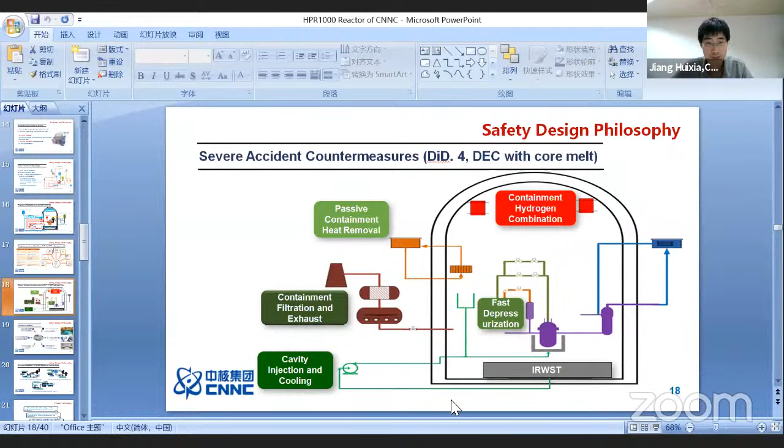Okay, thank you, Dr. Jiang, for the answer. I believe that's for the future. I think we can have further discussion, especially for Mr. Abu or the gentlemen already here, about the safety of HPR1000. Okay, ladies and gentlemen, that's the conclusion of the session for HPR1000.

Talking about the future, the licensing, and about the demonstration projects. For the concluding remarks, I'll hand over to Dr. Huang.

Okay, so thank you for attending this interesting thematic discussion. As mentioned, we have now reached the end of the first day seminar program. Today we are very honored by the presence of the leaders and directors from both sides, especially Mr. Dino from the Indonesian Embassy to China. We are using this half day to discuss three main